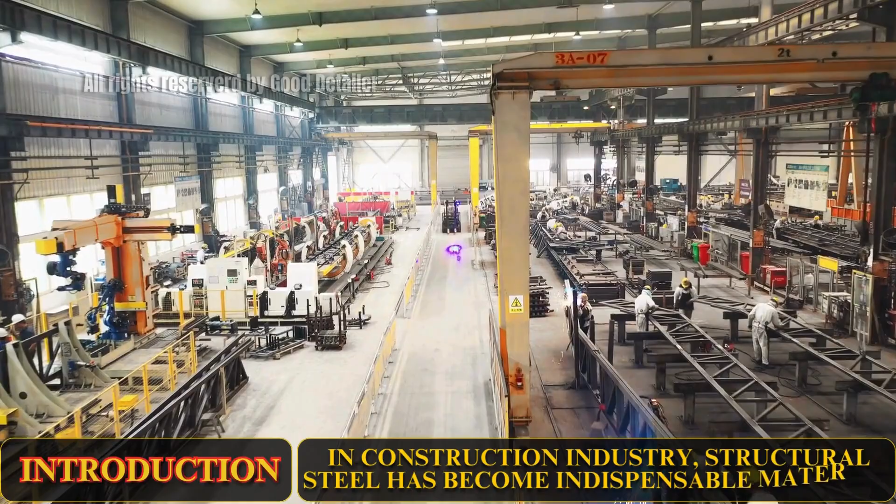Basic concepts of steel detailing. Introduction of structural steel detailing and training program. In construction industry, structural steel has become indispensable material. Steel has been most widely used material across the globe and considered as most reliable for the construction of structures of various shapes, sizes, and complexity.

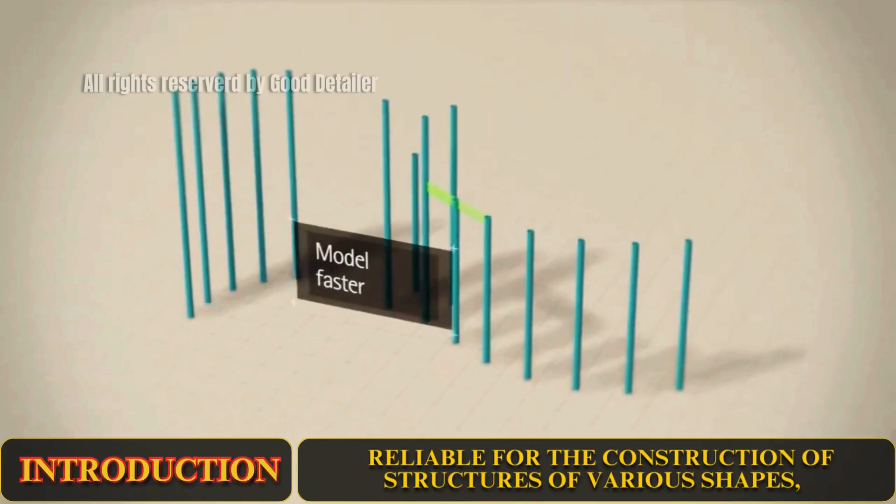Be it a small individual house or a skyscraper or a state-of-the-art airport or an extensively long bridge or a huge stadium, steel helps to transform architects' imagination into reality. This is very small briefing about detailer.

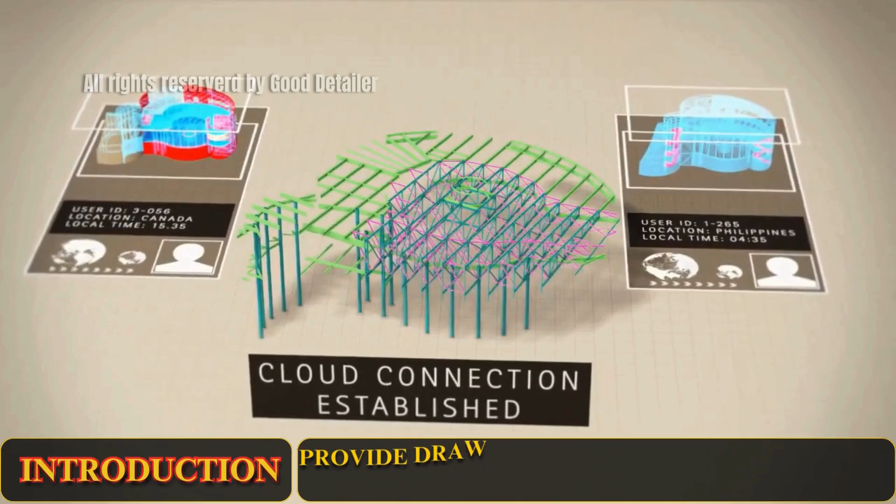In modern age, with the help of computers, various softwares and automation, process of steel detailing has been getting advanced day by day. Let us understand that, although computers and softwares assist in carrying out critical tasks of steel detailing, these are operated by steel detailer whose knowledge, skill, and expertise is the key to the process.

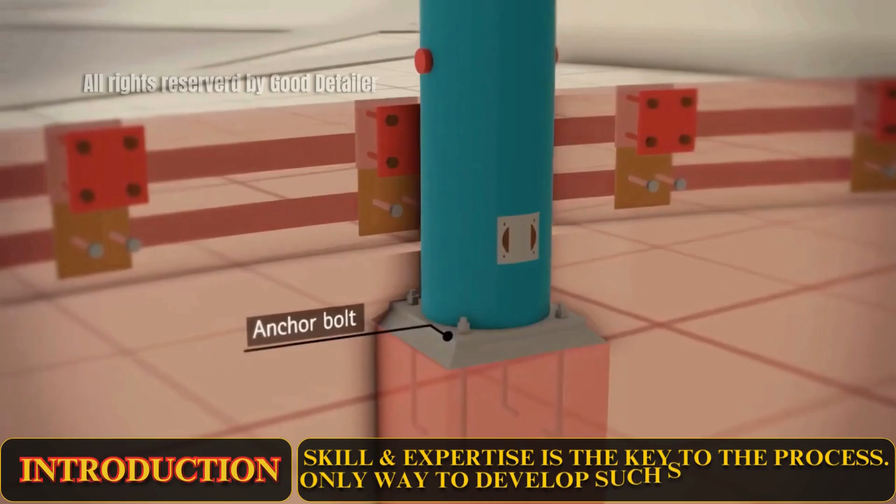Only way to develop such skilled and expert detailers is by imparting effective training to them. Even in computer age, importance of individuals' knowledge and skill is irreplaceable. Effective training followed by right application of knowledge on live projects will create such experts in the field of steel detailing. We are here to make such training program available for fresh candidates aspiring to be part of steel industry.

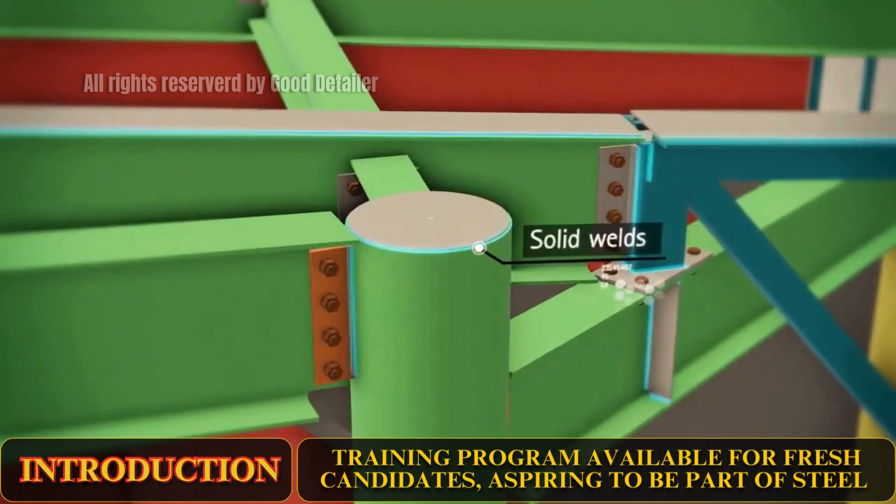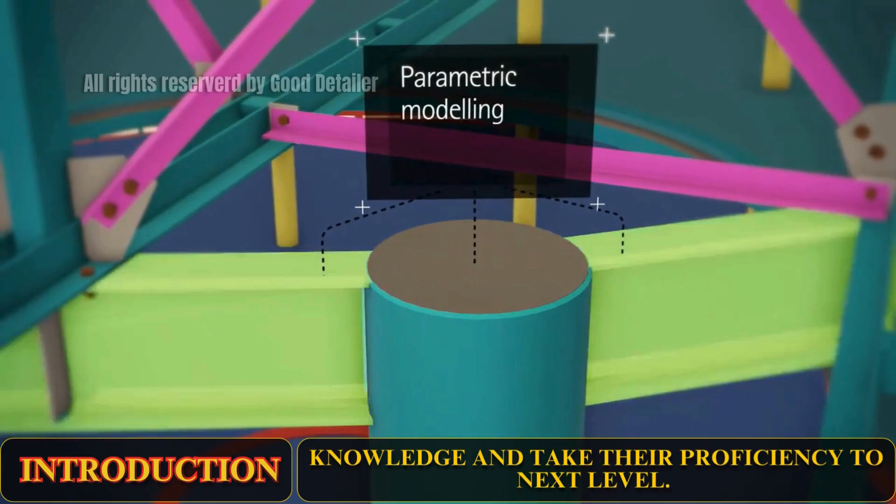Also, we would like to assure that this training program will give an opportunity for experienced steel detailers to further refine their knowledge and take their proficiency to next level. In today's extremely competitive world, every organization is looking for most skilled resources available in the industry and various ways of increasing productivity and quality.

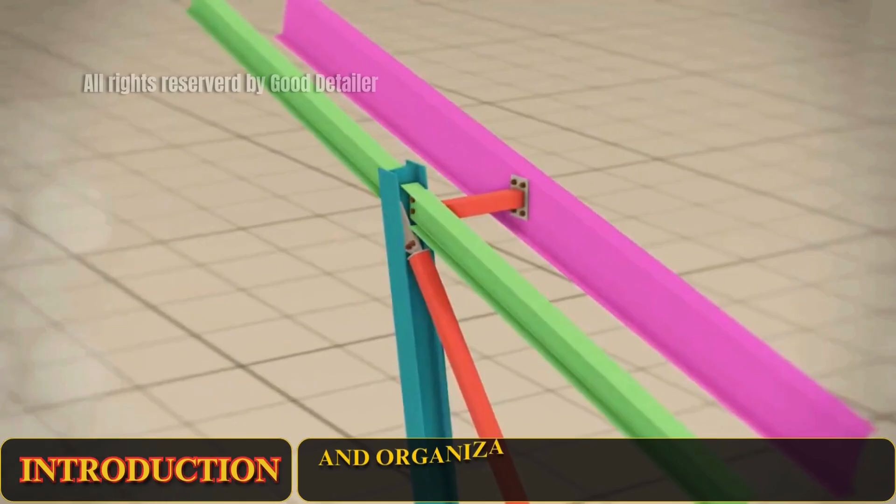The competition will only further intensify in future, and organizations will need every help which can increase efficiency, productivity, quality, and in turn, profitability. Training program will deliver: 1. Increased knowledge. 2. Better efficiency. 3. Enhanced quality. 4. Better productivity. 5. Value management. 6. Strong team development.

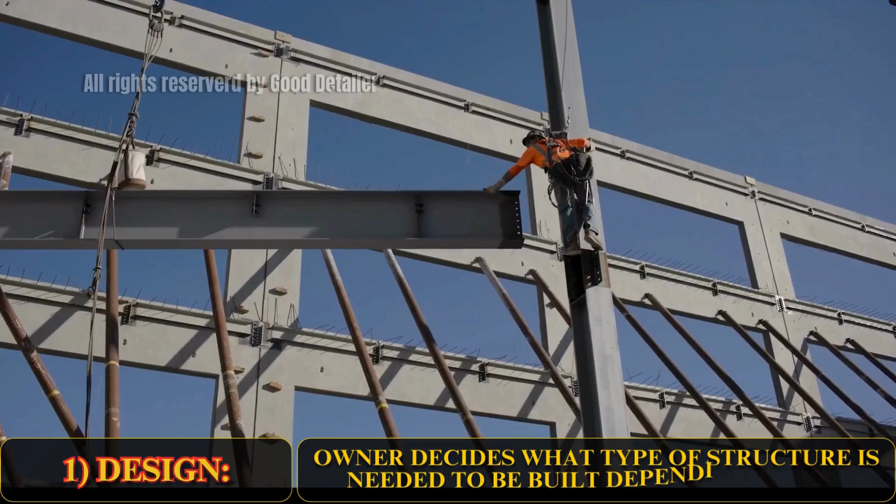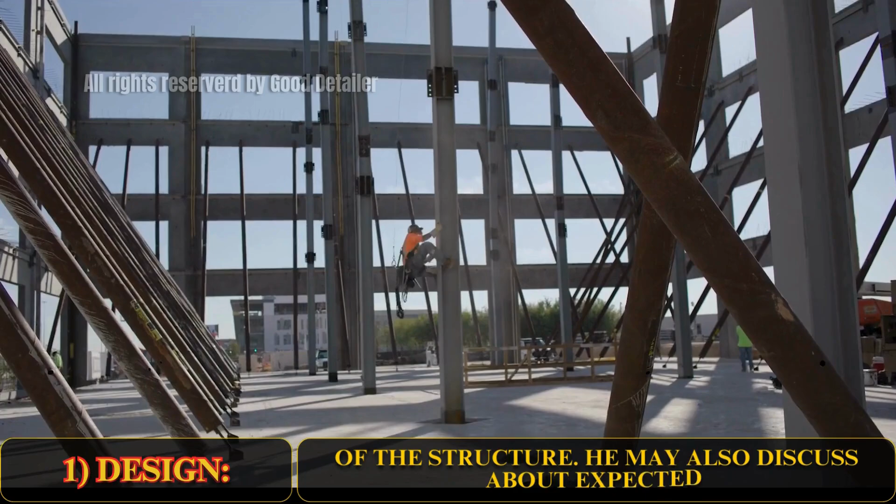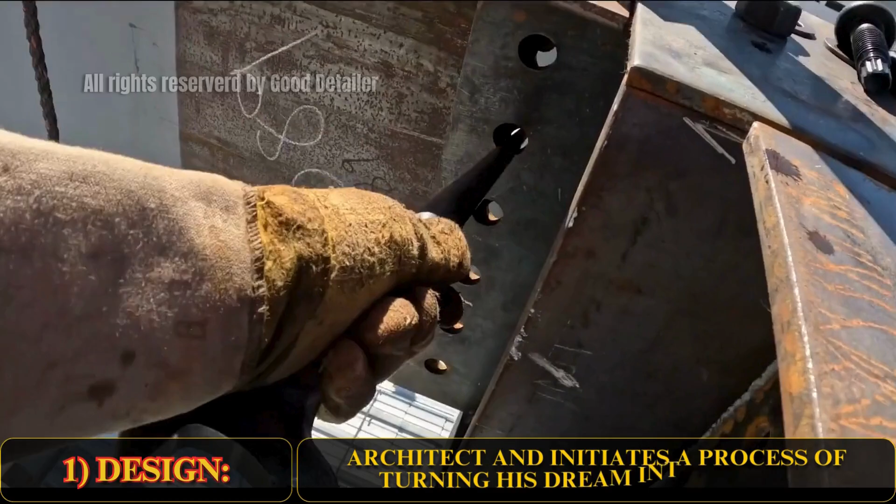Structural steel industry processes. 1. Design. Owner decides what type of structure is needed to be built, depending on its purpose to be served, expected utility. Owner approaches architect with his ideas and discusses regarding utility of the building, basic shape and size of the structure. He may also discuss about expected internal and external appearance. In other words, owner shares his dream with architect and initiates a process of turning his dream into reality.

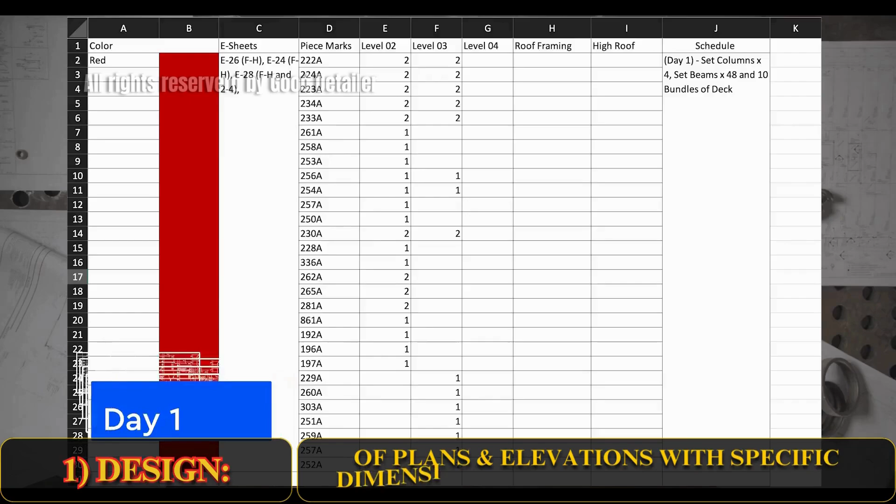Architect imaginatively creates layout of the structure. He prepares a set of plans and elevations with specific dimensions. He defines specifications to show all the salient features of the structure, including interior and exterior materials to be used and its appearance. Once design approved by the owner, structural engineer is appointed for steel design.

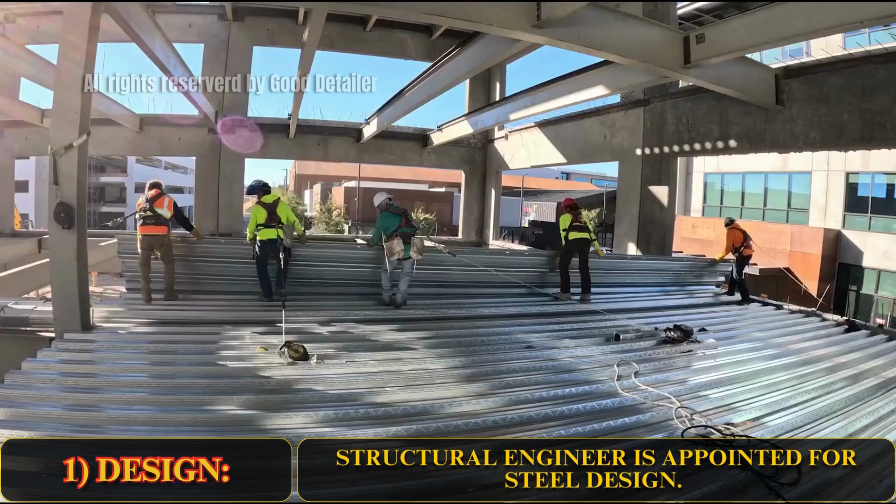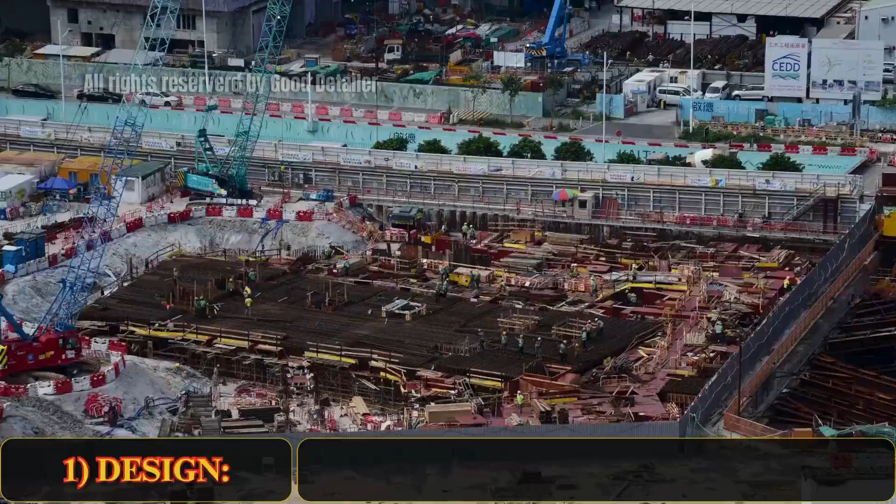Structural engineer designs the supporting structure. He considers various loading criteria with load values defined by industry standards codes and as per the location of structure. Based on the structural analysis done using one of the software, he determines forces in the framing members of the structure and accordingly finalizes sizing of these members to resist anticipated forces as per his analysis.

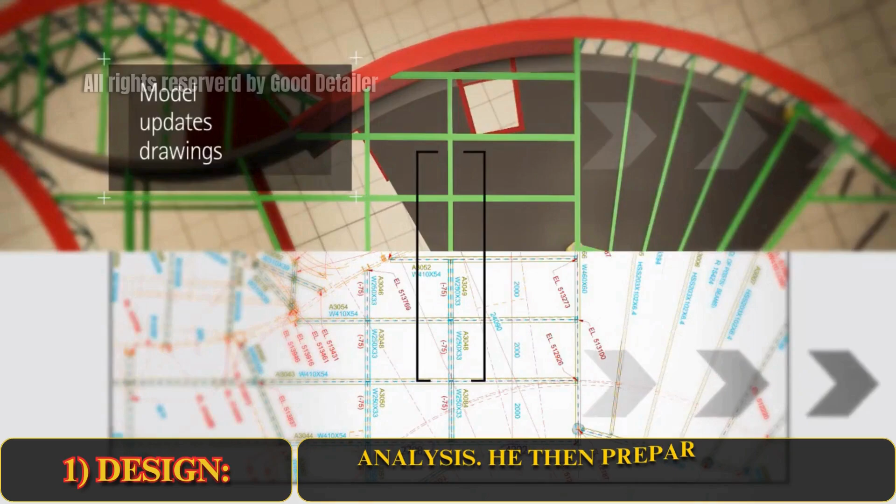He then prepares a set of structural drawings showing structural plans and elevations with various member sizes defined, typical and specific sections, various specific details describing precise framing and connection requirements, etc. 2. Detailing. Preparation of shop drawings for a steel fabricator is called steel detailing, and the person who does it is known as a steel detailer.

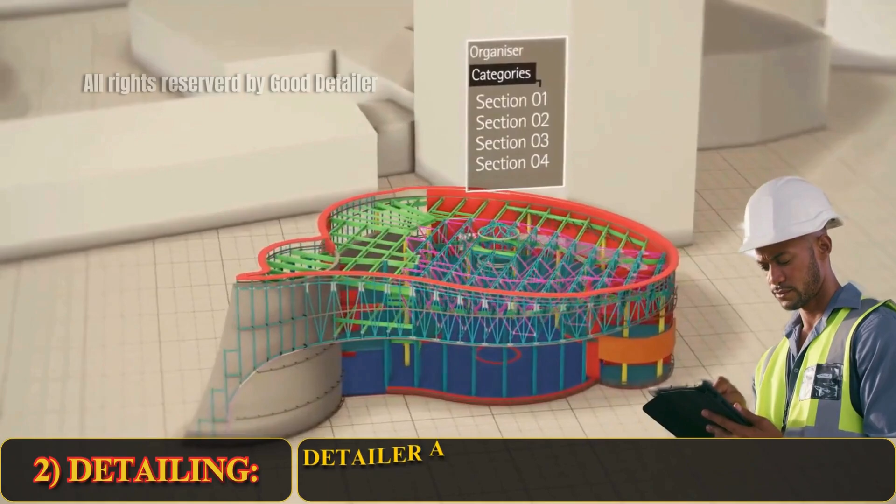Steel detailer uses the set of design drawings prepared by structural engineer and creates shop drawing for each and every member of the structure. Detailer also prepares erection drawings for erector. In other words, the steel detailer transforms design data into drawing/material information required by fabricator and erector to build the structure.

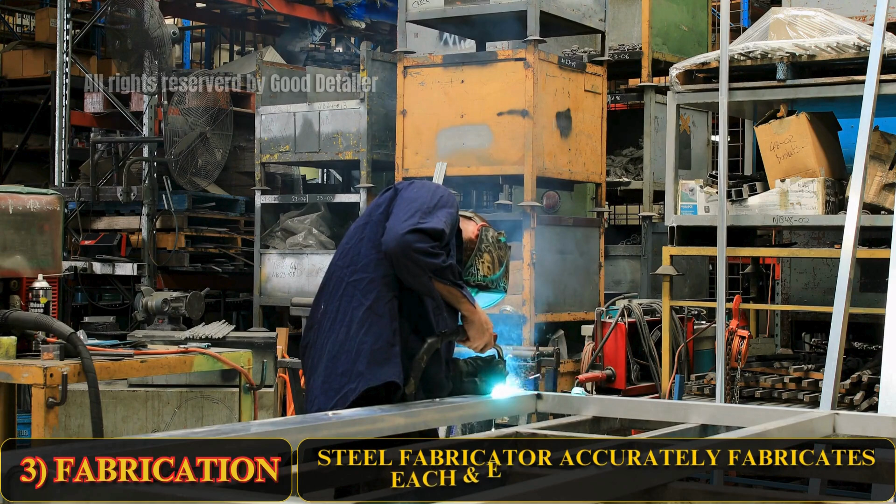3. Fabrication. Steel fabricator accurately fabricates each and every member or element of the structure with the help of shop drawings prepared by steel detailer. 4. Shipping. Once the fabrication is done, steel fabricator needs to ship the material to the job site on time as per construction schedule.

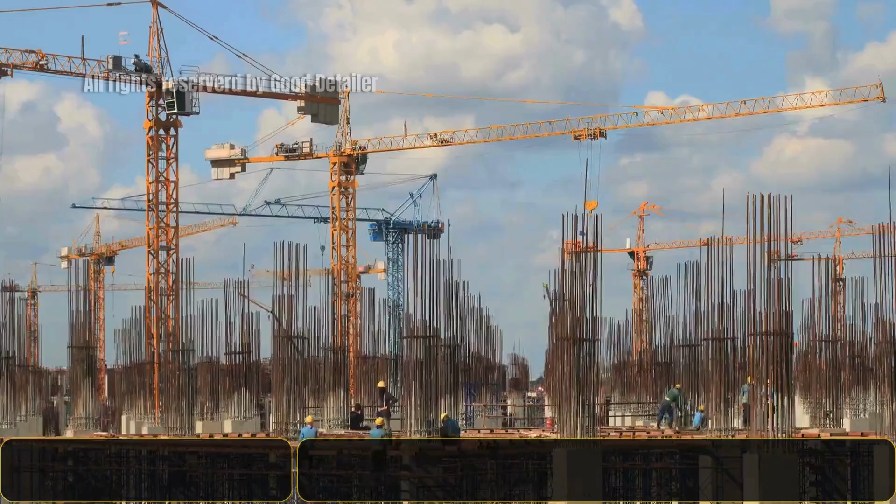5. Erection. After receiving fabricated material on site, erector erects each member with the help of erection drawings prepared by steel detailer. Erector needs to make sure that the structure is precisely plumbed and aligned, and also ensure that all joints fit properly as per structural design specification.

Advantages of steel structures and types of steel structures. Advantages. 1. Design flexibility and strength. Steel as a construction material is light but strong enough and flexible to be used for building any kind of structure.

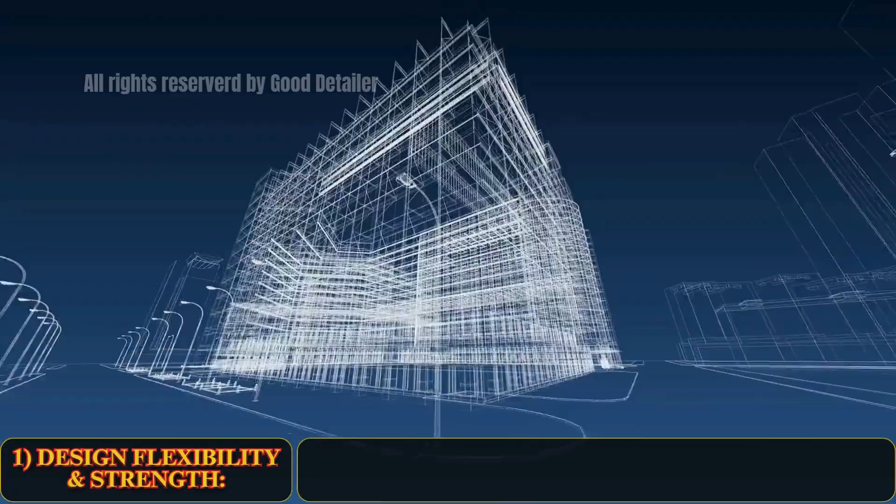It is produced in a wide range of shapes, which permits a lot of flexibility in design. It is uniform in quality and dimensionally stable. This encourages architects and engineers to imagine something unimaginable and bring it into reality for the world to be astonished.

2. Durable. Steel is durable and its durability is unaffected by alternate freezing and thawing. 3. Economical. Steel is relatively more economical. 4. Rapid construction and buildable in any season. With precise fabrication, steel structures can be built faster than other materials and in any season or weather.

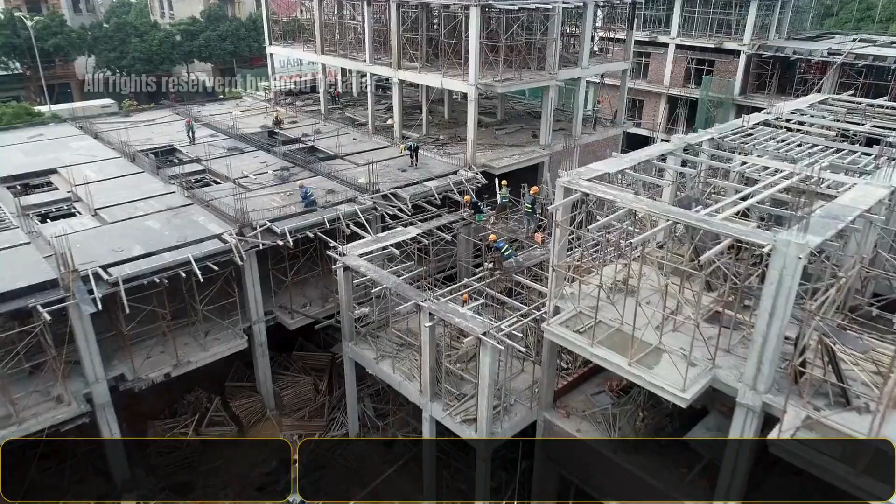5. Relatively easy to alter the structure. Steel also allows existing structures to be altered or expanded. 6. Easy field repairs. Field repairs are easier and faster with steel as compared to other materials.

Types of structures. Steel is used for the construction of various types of bridges and various types of utility buildings and structures. We may divide these utility structures broadly into 4 main categories: residential, industrial, commercial, and special purpose structures. Residential structures: 1. Residential buildings. 2. Individual houses, bungalows. 3. Apartments. 4. Condominiums.

Industrial structures: 1. Heavy manufacturing facilities, manufacturing steel, cement, automobiles, etc. 2. Light manufacturing facilities, manufacturing fans, water pumps, processed food, gadgets, etc. 3. Power plants. 4. Warehouses. 5. Data centers or telecom centers. 6. Research and development centers. 7. Cold storage buildings. 8. Flex buildings. 9. Showroom buildings.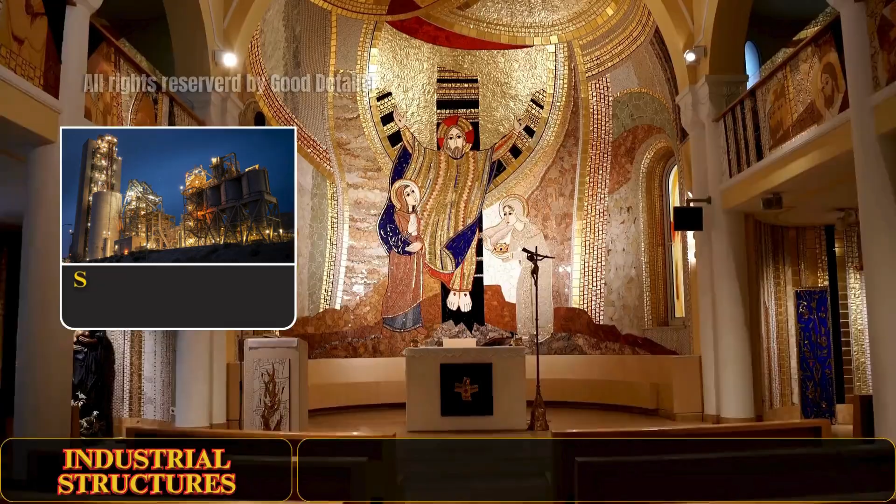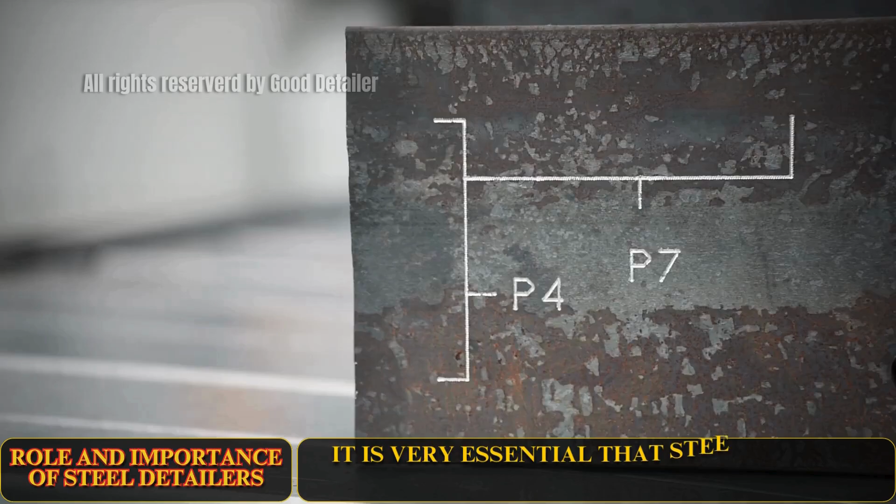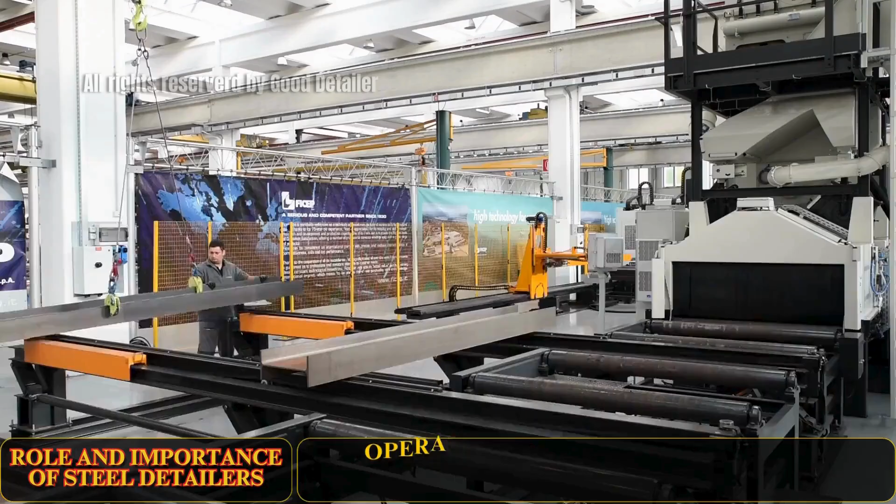Role and importance of steel detailers. For the successful and timely completion of any steel construction, it is very essential that steel members are precisely fabricated in the shop. The fabrication process consists of cutting, coping, drilling, and welding operations, which must be done to absolute precision. Every bolt in the structure needs to fit perfectly on site. Also, the erector should get all relevant information on erection drawings. This will make sure that erection goes on uninterrupted and the structure gets erected in time, with all the members perfectly fitting together and all design requirements precisely fulfilled.

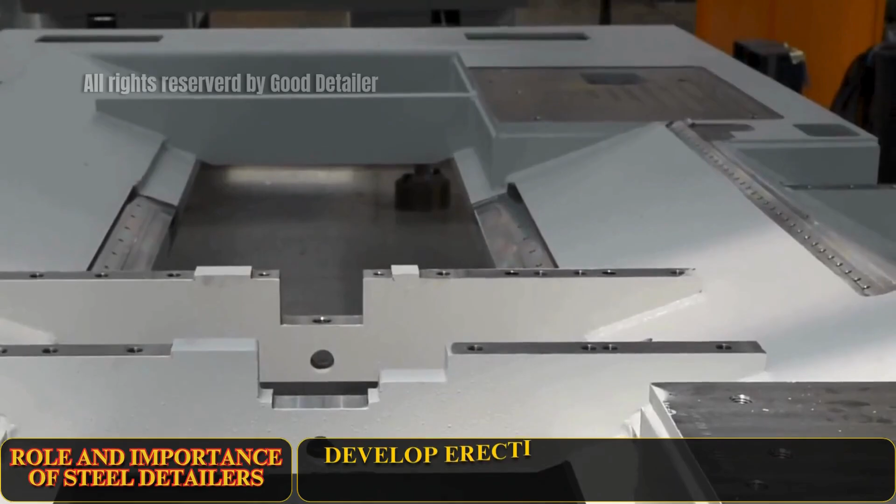To accomplish this formidable task, the detailing process and the role of a detailer is extremely important. The detailer must produce shop drawings precisely showing exact cutting, drilling, and welding requirements for every member so that the fabricator can fabricate and deliver perfectly finished steel members to site. The detailer also needs to develop erection drawings for the erector with detailed information on placement of steel members, bolting and welding requirements, etc.

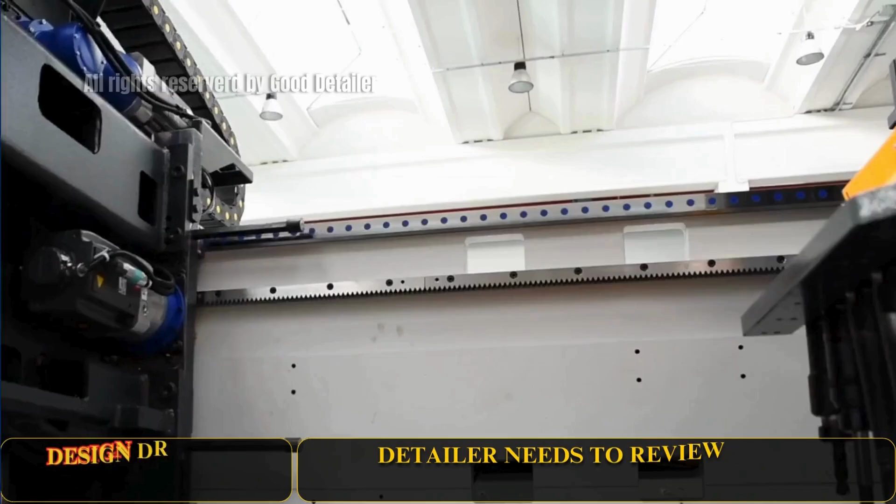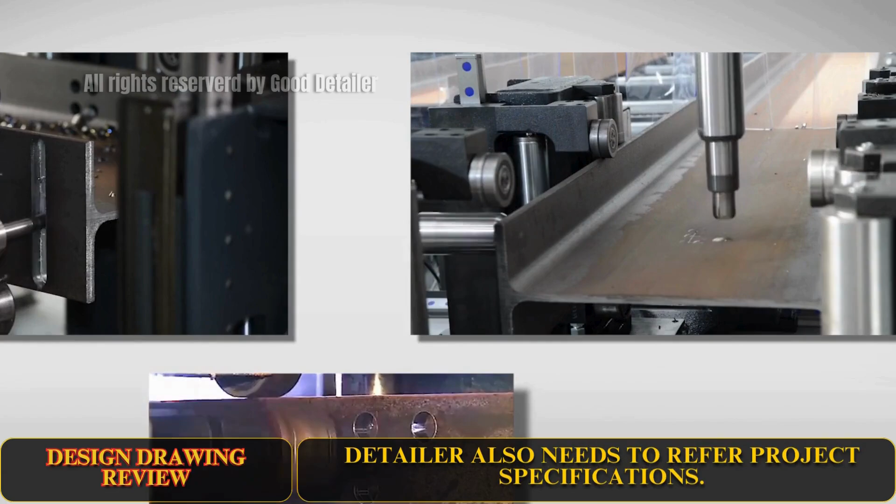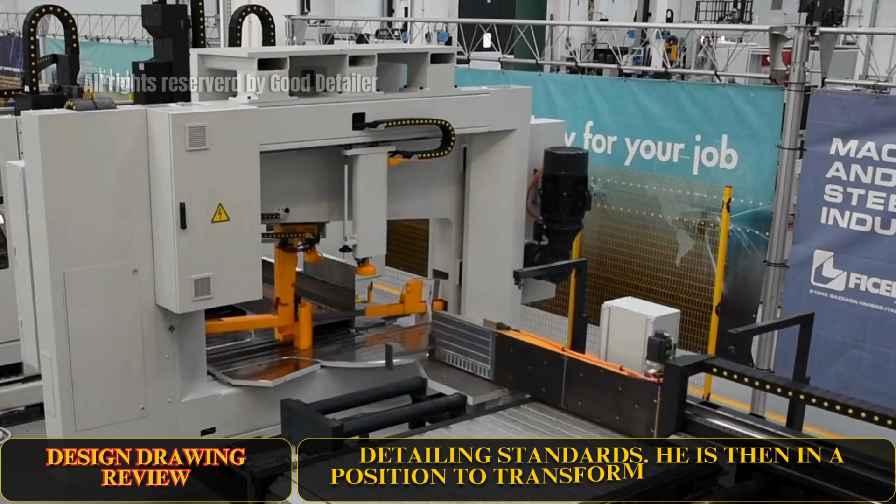Design drawing review. The detailer needs to review and study architectural, structural, and on some jobs even MEP (mechanical, electrical, piping) drawings. The basic intention of this review is to understand structural and architectural requirements defined on design drawings. The detailer also needs to refer to project specifications. He should also precisely know AISC and AWS specifications and the fabricator's detailing standards. He is then in a position to transform the design data into fabrication drawings for a fabricator and erection drawings for an erector.

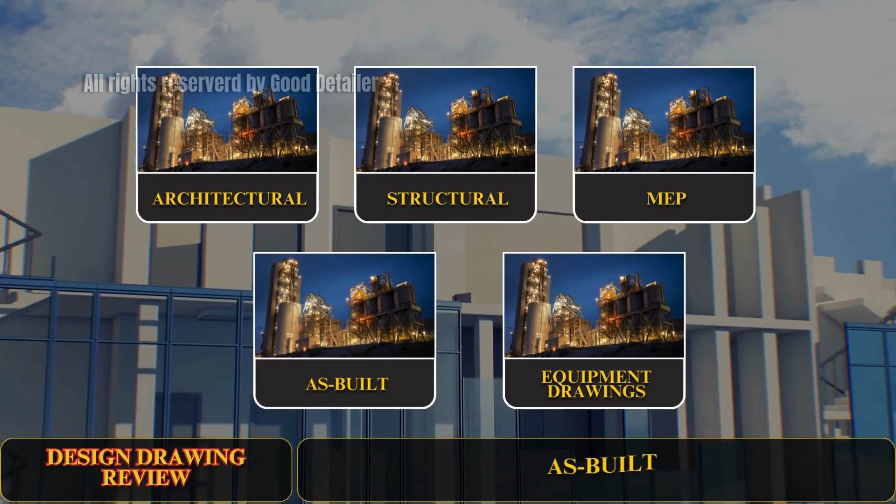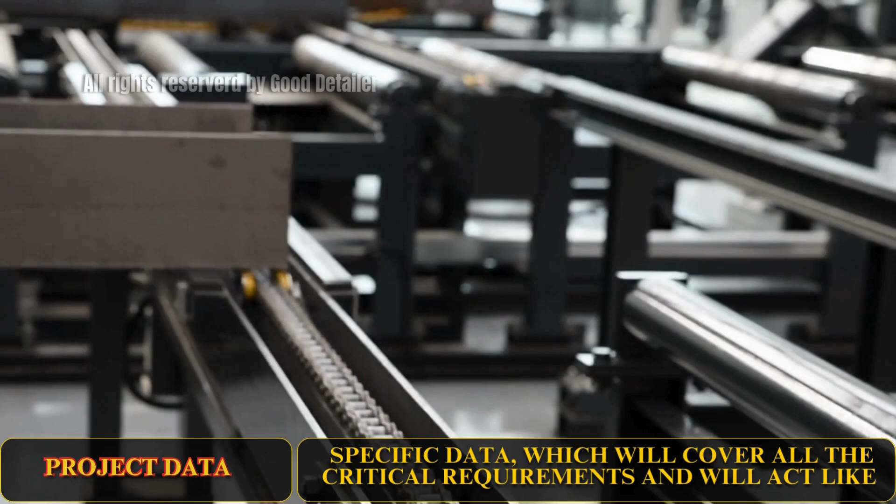Design drawings are categorized into 5 key parts: architectural, structural, MEP, as-built, and equipment drawings. Each part plays a vital role in ensuring accurate planning, construction, and documentation of a project. Project data. While reviewing design drawings, the detailer needs to generate project-specific data which will cover all the critical requirements and act as guidelines for project execution. Any missing or conflicting information on design drawings needs to be verified with the respective party: architect, structural engineer, MEP engineer, etc. This process is called raising RFIs.

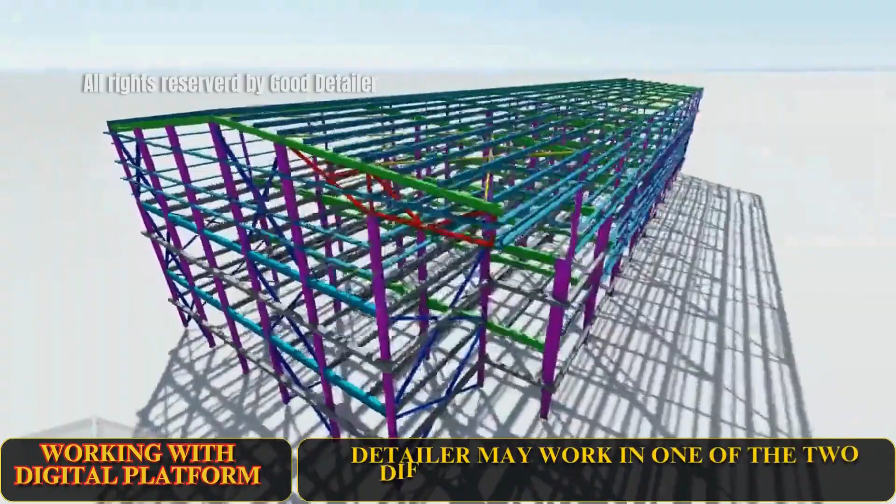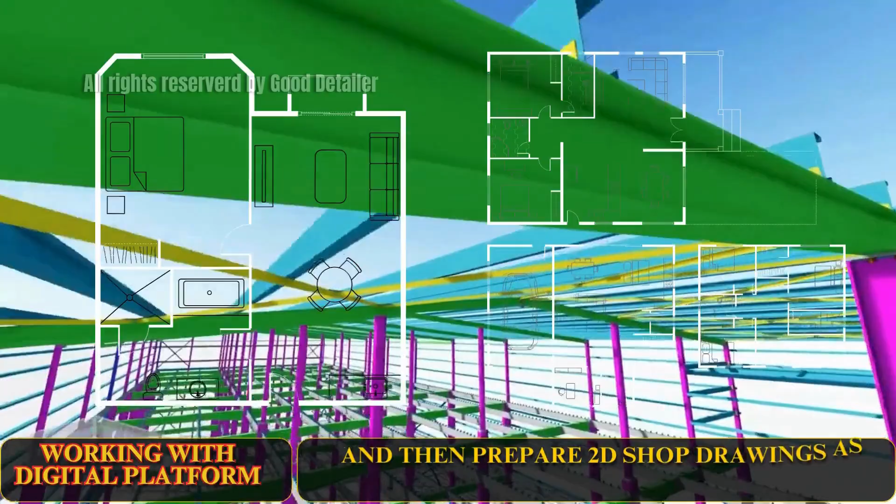Working with a digital platform, the detailer may work in one of 2 different frameworks. One is 3D, a 3-dimensional model, and the other is 2D, 2-dimensional drawing. How to build the project in digital/graphical format. Presently, there are multiple software packages which can be used to build a 3D model of the structure and then prepare 2D shop drawings as well as erection drawings.

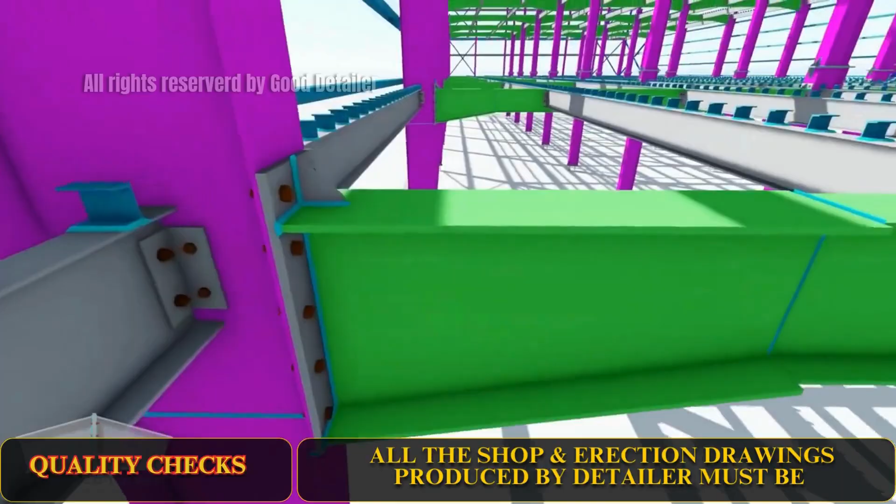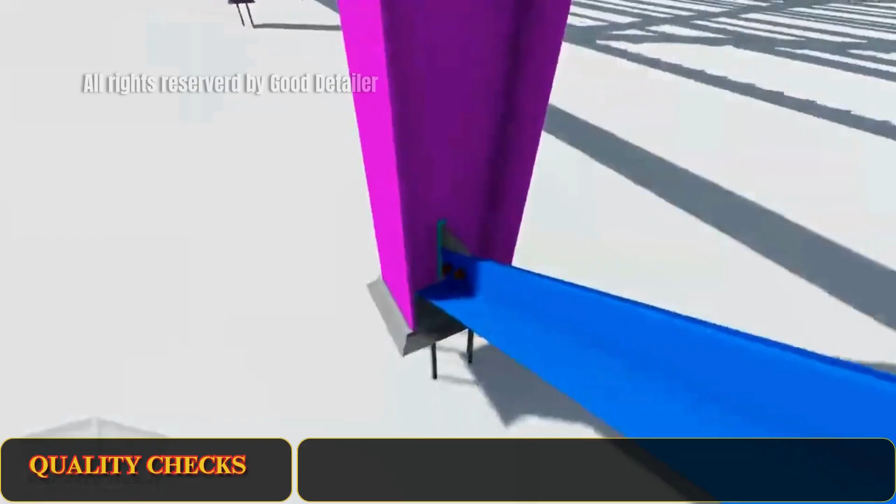Quality checks. All the shop and erection drawings produced by the detailer must be thoroughly checked for correctness before submitting them for the EOR (engineer of record) approval process, and after the EOR's approval, while submitting for fabrication and erection. Changes/revisions. Any design changes per revised design drawings received during execution of the project, or any changes received as engineer's comments on drawings submitted for approval, need to be implemented precisely and tracked.